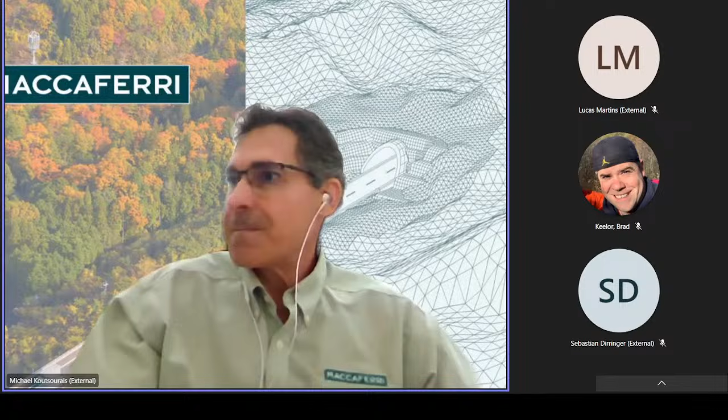Okay, good afternoon, everyone. Let me go ahead and share. Okay, hopefully everybody is now seeing the screen. Good afternoon again. My name is Mike Koutsourais. I'm the Geohazard Mitigations Business Unit Manager of North America for Maccaferri. For those of you unfamiliar with Maccaferri, the company was established 144 years ago. Currently has over 3,000 employees worldwide and services over 130 countries. In addition to having invented the Gabion basket, Maccaferri has been manufacturing and supplying geohazard mitigation systems throughout the world for over 60 years and is recognized as a leading innovator and manufacturer of these solutions.

I want to welcome you to our first geohazard mitigation webinar on simple drapery systems for rockfall mitigation. This webinar is the first of 3 geohazard mitigation webinars in which we will discuss the design, specification, and installation of simple drapery systems used for rockfall protection. Please look out for future ads on webinar number 2, where we will discuss how steel wire mesh is used as a flexible facing for pin drapery and soil nailing systems, and webinar 3, where we will discuss rockfall barriers and attenuators.

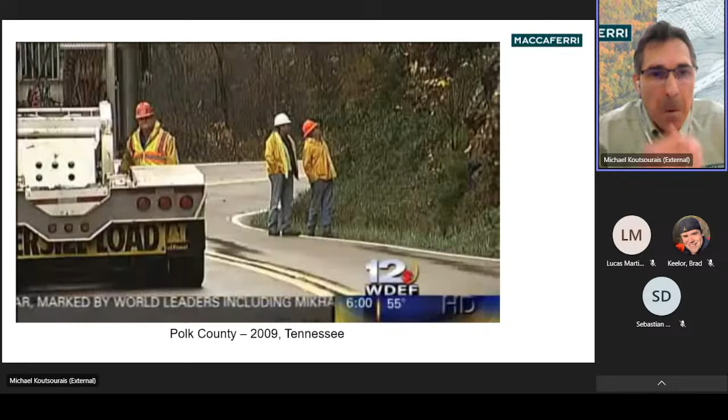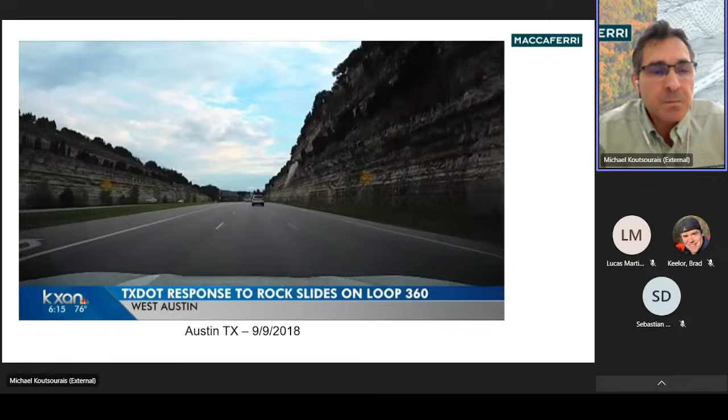Of the cliff, to see if there's anything that needs to be cleaned up. Then in about a week is when they plan to bring in equipment and really pick up all of the debris from the rock slides sitting on the side of 360 like you see now.

Now, if we're talking about the top of the cliffs, that is a different story we want to show you right now, and that is to remove rocks that may fall. Think larger rocks that could pose a bigger problem, things that look like they may shake loose. Now, that would require TxDOT to coordinate with private property owners.

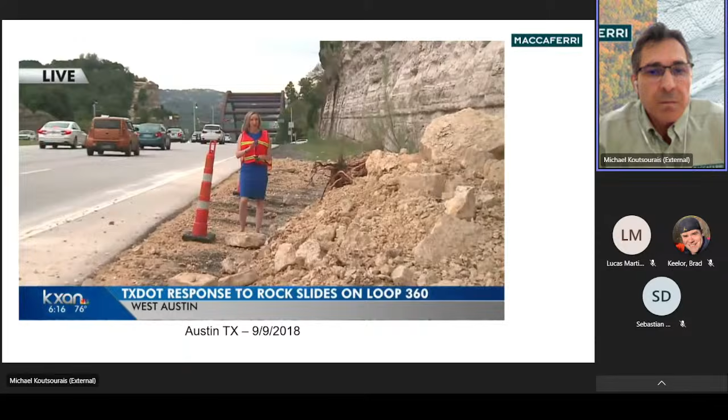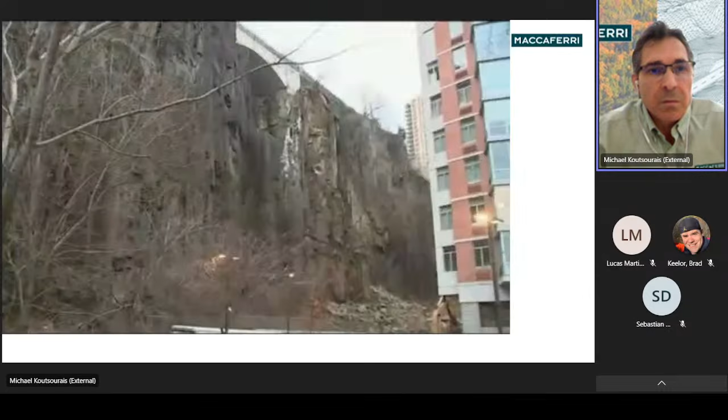Here's another one, just last month, occurring in northern New Jersey. More concerns tonight about the stability of the rocks on the spectacular Palisades in New Jersey overlooking the Hudson River.

A rock slide after Sunday night's rain damaged several cars at a luxury apartment complex. Tonight residents are worried about more rock slides and what can be done to protect them. Here's New Jersey reporter Anthony Johnson.

The rock slide was caused by the heavy rain we had Sunday into Monday. That's the conclusion reached by engineers. But residents living above the site believe increasing traffic is playing a part in causing the ground to shift.

There's been a large amount of heavy truck traffic in the area, cutting through these streets to avoid traffic in other areas, and there is an increased amount of vibrations, which is easy enough to feel. Antonio points to cracks in his retaining wall, which he recently repaired, to show the ground is shaking. These cracks were not here last year.

A photo taken inside the Dutchess apartment complex on River Road, just below the cliff, showed just how dangerous this could have been, with rocks landing in the building. Mud and rocks also covered vehicles parked in the back of the building.

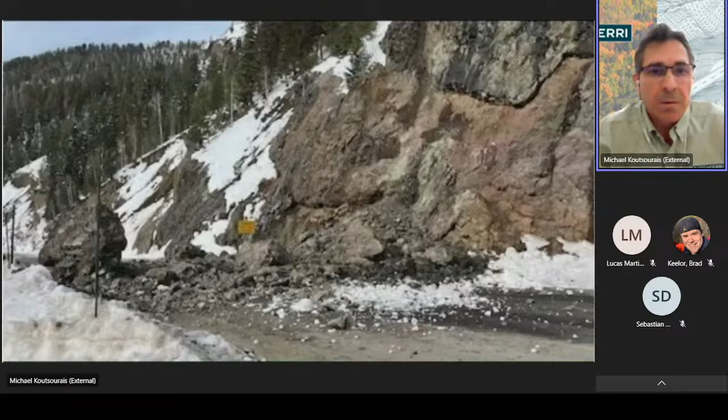John F. Kennedy Boulevard. And this one also just last month in Colorado. Images tonight of a rock slide on Wolf Creek Pass. Look at this, CDOT sharing this photo of the damage. It's off Highway 160 between Pagosa Springs and South Fork today.

You can see the road really was completely covered in rock right there. Officials say the highway was closed for a while, but they were able to open a single lane. They want anyone heading that direction to know there will be delays and one lane alternating traffic.

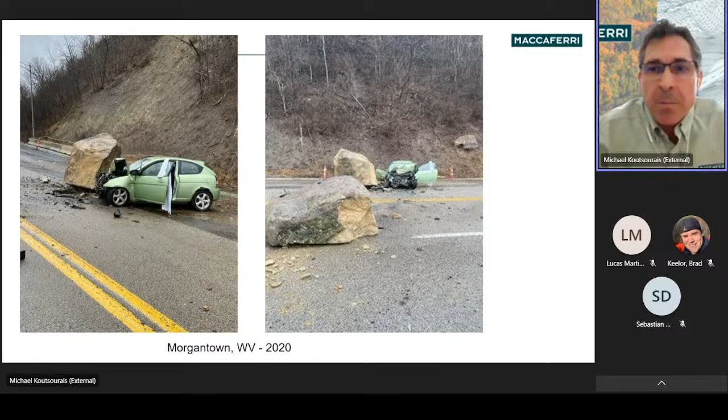All right, images tonight of a rock slide. This occurred back in February of 2020. This rockfall event sent three people to the hospital after a boulder struck a car on Monongahela Boulevard in Morgantown, West Virginia.

Possible rockfall solutions can be categorized into one of two methods. The first is to control or contain the event at its origin, and the second is to protect or intercept the event after its detachment.

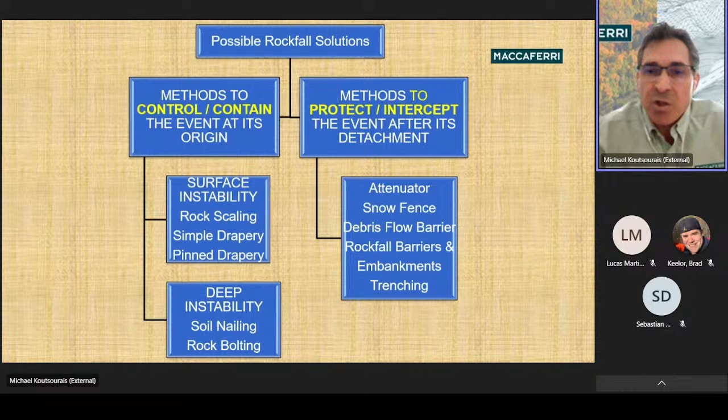Conventional methods to contain or control a surface instability at its origin include rock scaling, and simple and pin drapery systems. Soil nailing and rock bolting are used to control deeper instabilities. Methods to protect or intercept the geohazard include rockfall barriers, embankments and attenuators, and debris flow or shallow landslide barriers.

Methods to control and contain the rockfall event vary depending upon the nature of the instability. For example, to mitigate against superficial instabilities, as shown on the left side of the slide, a simple drapery may be considered to control superficial instability of smaller sized rockfall, whereas a pin drapery system may be considered to contain superficial instability of larger sized rockfall. The key word to consider for a mitigation approach that might include a simple or pin drapery system is superficial instability.

In choosing the right system for your project, it is also common to combine a simple drapery system with other mitigation systems, such as a pin drapery and/or a rockfall barrier, within the same scope of work to optimize costs and effectiveness.

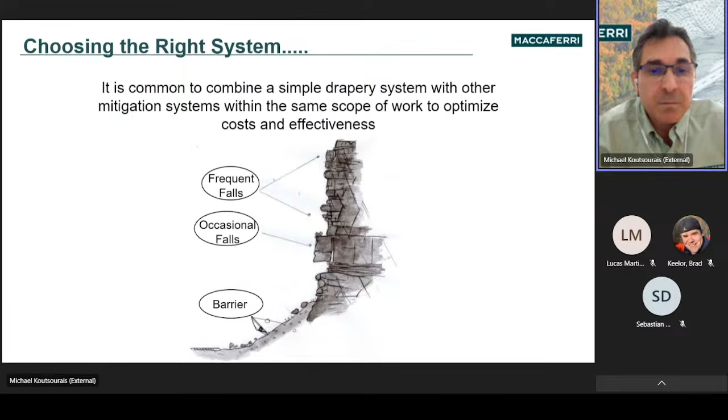Choosing the right mitigation system requires the designer to consider its placement proximity to the detachment area of the hazard and its most effective placement location. Systems that are placed close to the detachment area are typically simple or pin draperies. However, hybrid barriers and attenuators might also be a solution to consider.

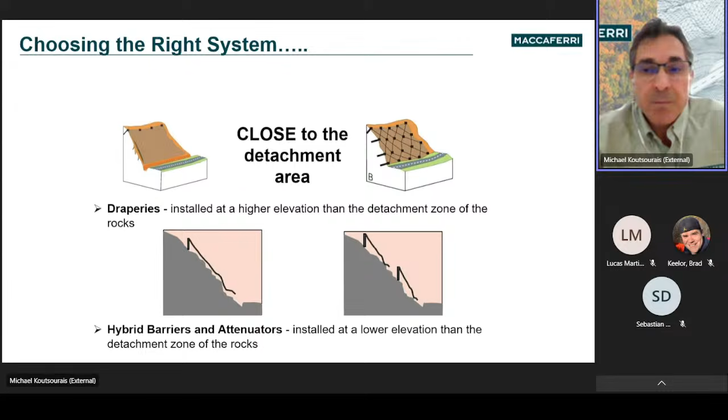Note that draperies are installed at a higher elevation than the detachment zone of the hazard, whereas hybrid barriers and attenuators are installed at a lower elevation than the detachment zone of the hazard.

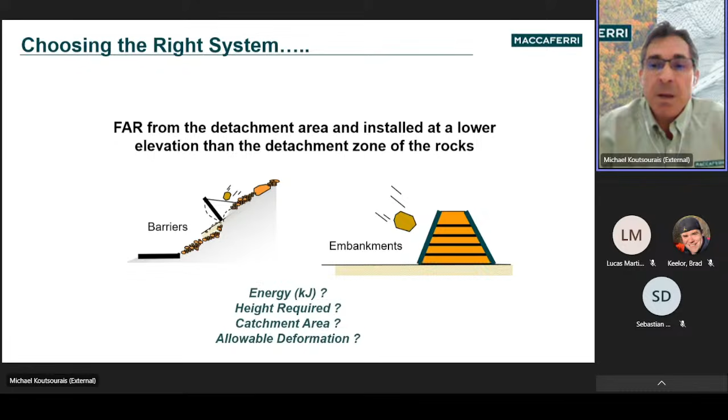Rockfall barriers and embankments are systems that are installed far away from the detachment area and at a lower elevation than the detachment zone, and are designed to intercept the hazard. For these systems, it's necessary to determine the energy that the protection system must resist, as well as the required height and allowable deformation to keep the hazard from impacting adjacent people and infrastructure.

Today we will focus our attention on the simple drapery system. We will present the application, design method, system components, and properties that a designer should specify, and finish up with some practical installation considerations and case histories.

A simple drapery consists of a high-strength steel wire mesh system that provides passive containment of the rock, meaning it allows for the movement of the rock. It's the movement of the rock that mobilizes the strength properties of the netting.

The goal is to control or contain the rock trajectory, reduce its energy and velocity, and force a sliding action down the slope, rather than allowing an uncontrolled free fall resulting in an impact and rebound.

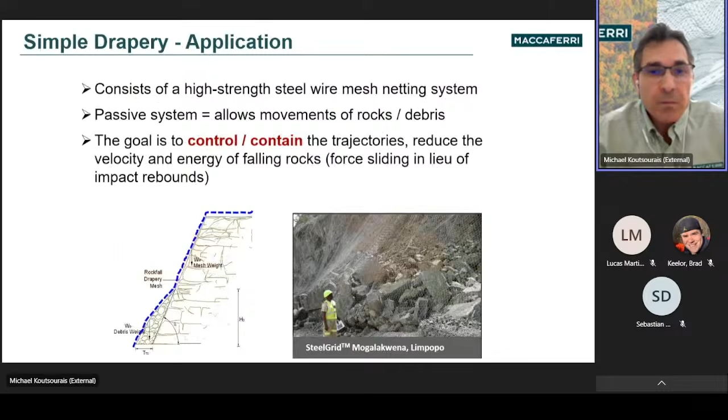A simple drapery will always be anchored at the top of the slope, but may or may not be anchored at the bottom. An open toe will require a catchment area at the bottom of the slope that would need to be designed to accommodate the debris, whereas if no catchment area is available, then the drape will need to be sealed at the bottom.

The anchors provide no stabilization effect. They are merely there to hold the drapery system on the slope and contain any debris from encroaching on the adjacent structure at the toe. The function of the simple drapery is to let debris collect at the bottom of the slope.

Looking specifically at the pros and cons of an open toe simple drapery: it's cost effective, very easy to construct and maintain. There's no excessive stress on the mesh and anchors since the toe is left open, and it can be designed for various size rocks with good control of the rockfall.

There is maintenance that's going to be required, and you do need ample space at the bottom of the slope for catchment.

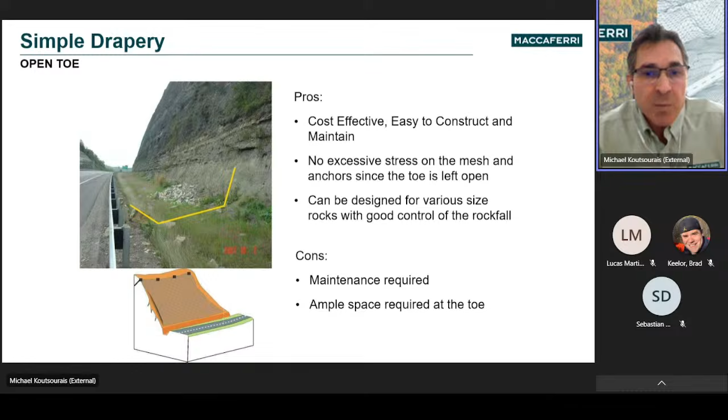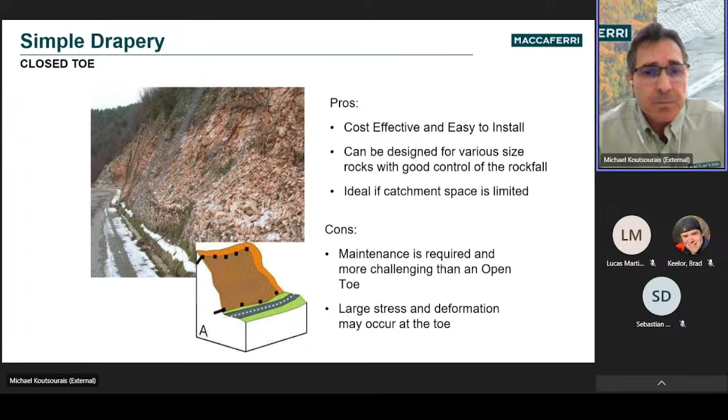As with any civil structure, it's always better to engineer the system, taking into consideration the slope characteristics, size of rock, expected debris accumulation, geological considerations, and potential failure modes. Of course, failures can be costly and embarrassing.

From a general design perspective, keeping things simple, we'll look at designing three main components: the steel wire mesh, the anchors required to hold up the mesh, and the cable required to hold the anchors. The goal, once again, is to control the trajectories, reduce the velocity and energy of the falling rock, and allow for controlled accumulation of debris at the bottom of the slope.

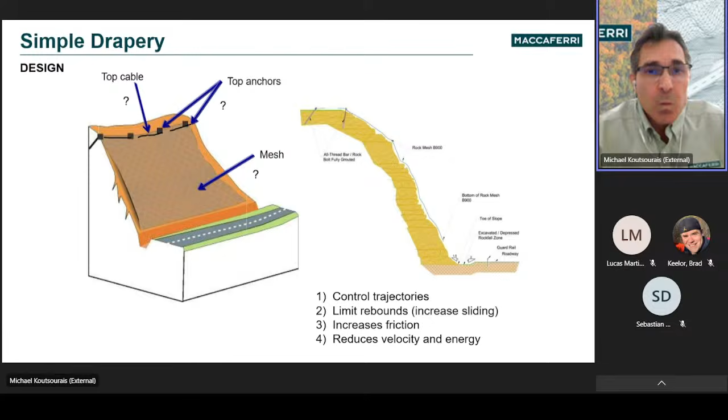The design will verify first the mesh resistance required, second, the top cable resistance required, and third and fourth, the intermediate and lateral anchor resistance required.

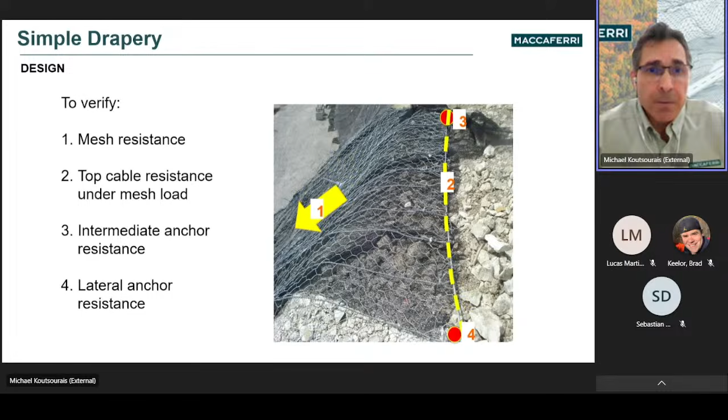To perform a realistic design, we must first have some basic understanding of the site conditions and usually make some reasonable assumptions. Here are some basic input considerations: slope height and steepness, density and strength of the debris, volume of debris accumulation and/or size of individual unstable rocks, and if snow or ice conditions may exist. We may need to make some reasonable assumptions to consider this additional load to the system as well.

The design of a simple drapery system must consider both the weight of the mesh and the weight of the rock debris that loads the mesh at the bottom of the slope, creating a tensile force on the mesh. As the debris accumulates at the bottom of the slope, the mesh strength must be designed to contain the debris accumulation.

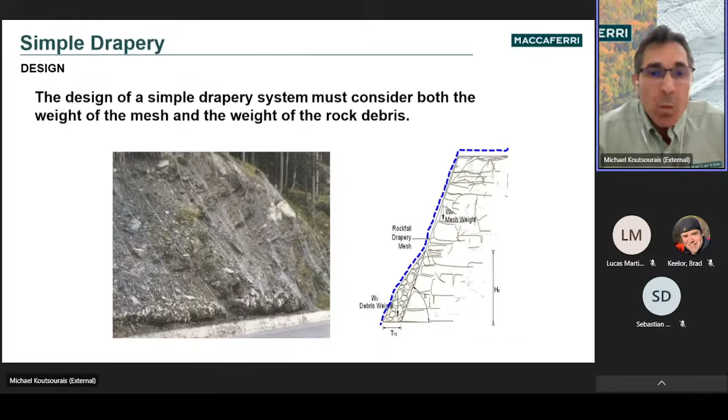The stress acting on the steel wire mesh is a function of the slope inclination, the debris accumulation, and the friction between the debris and the slope. As you see in this chart, the force acting on the mesh is on the y-axis, and the height of debris accumulation is on the x-axis. The force acting on the mesh increases as the debris accumulation increases, and the load also increases as the slope angle increases.

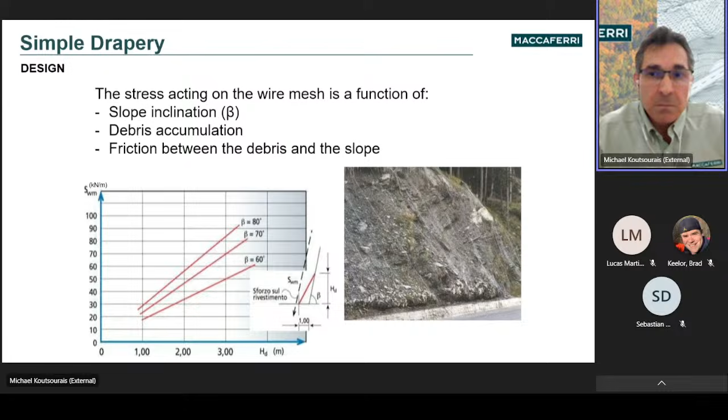The design method used is a limit equilibrium analysis, where we're determining the sum of the resisting and driving forces and determining a factor of safety. The resisting force includes the tensile strength of the mesh, which is transferred to the top cable and anchors. The driving forces include the weight of the mesh and the debris and snow loads.

Looking closely at the free body diagram to the right, you may notice while the mesh weight is a driving force that must be resisted, it is also a stabilizing force critical to containing the unstable rock or debris and dampening the rockfall energy.

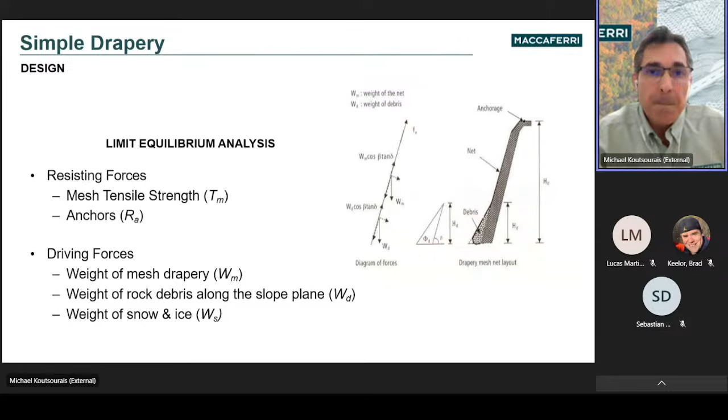The tensile strength of the mesh and the strength capacity of the top anchors must resist the load from the debris and snow and the weight of the mesh. The state of limit equilibrium is achieved when the sum of the resisting forces equals the sum of the driving forces.

The effect of snow and ice is very real and can have a large impact on the tensile strength requirement of the mesh and pull-out capacity required for the anchors.

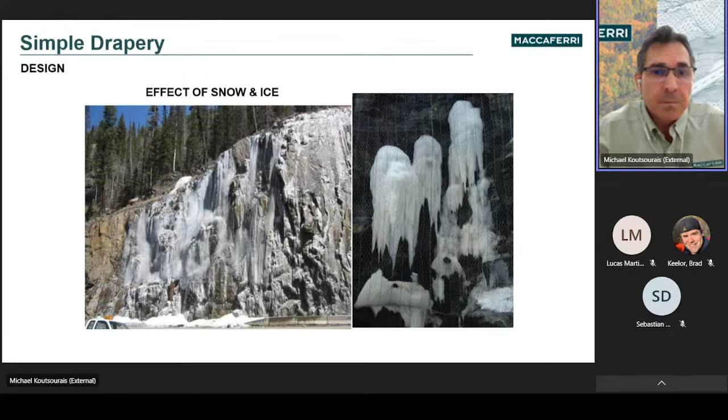The design of a simple drapery system must consider a realistic amount of debris that can be contained and consequently the stress in the mesh. The width of the debris accumulation, the mobilized deformation of the mesh, and the allowable distance to any adjacent pavement or structure, and the space needed for periodic maintenance must all be compatible.

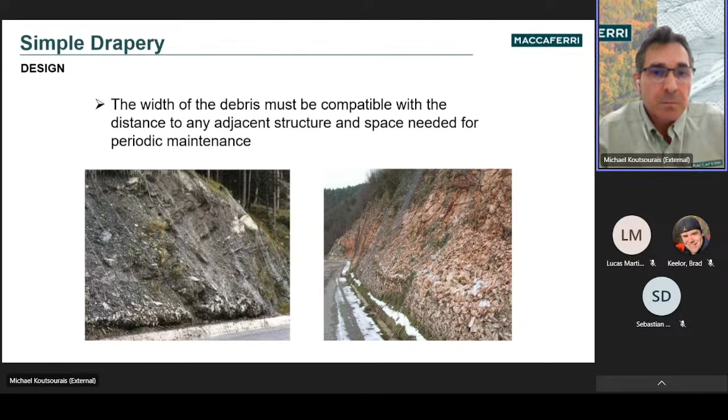The ability of a mesh to provide stabilization is determined by the mesh's ability to mobilize its strength under load. It's important that the strength of the mesh be mobilized within an acceptable design deformation.

This would be a concern for a closed-toe simple drape. The greater the deformation of the mesh under load, the more debris that can accumulate at the toe of the slope. As more and more debris accumulates, the required tensile strength of the mesh would need to be increased.

To control deformation under load and mobilize the full tensile strength capacity of the mesh, vertical high-strength steel cables may be woven into the mesh during the manufacturing process.

The Federal Highway Administration has acknowledged that the inclusion of vertical ropes in addition to a top horizontal rope reduces the stress concentration on the mesh as well as along the top horizontal rope.

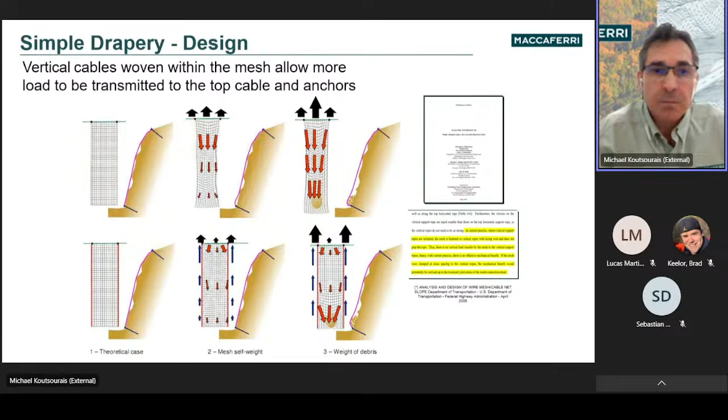With increasing the frequency of the longitudinal cables, higher tensile strengths are achieved at low deformations, and the reduction in stress concentration to the mesh and top cable is further improved.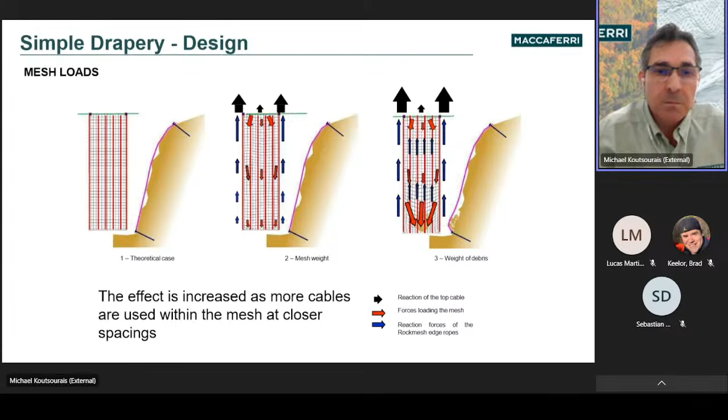Maccaferri manufactures a composite cabled mesh, which consists of a double-twisted steel wire mesh and high tensile strength steel cables, which are woven under tension into the mesh during the manufacturing process. The pre-tensioned high-strength steel cables result in ultimate strengths that are mobilized at only 6% strain.

The lower elongation under load results in less loading on the drapery system.

The Maccaferri SteelGrid HR is manufactured with high-strength steel cables woven longitudinally into the simple double-twist wire mesh. These longitudinal cables can be spaced anywhere from 20 centimeters apart, which is our SteelGrid HR20, to 400 centimeters apart, which is the SteelGrid HR400. Our most common product used is the SteelGrid HR30, where the cables are spaced 1 foot apart longitudinally.

These high-strength steel cables can also be inserted laterally as well as longitudinally. This is our RockMesh series of products. Our most common RockMesh products would have the longitudinal and lateral cables spaced 30 to 100 centimeters apart. RockMesh 3030, for example, which is shown in the photo, has the cables spaced 30 centimeters apart in both directions.

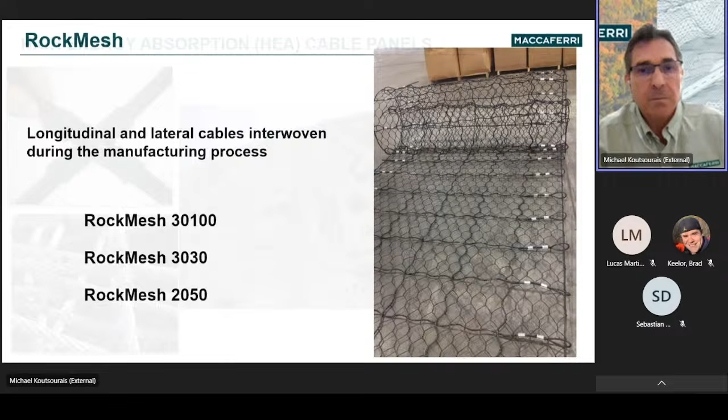The Maccaferri High Energy Absorption HEA cable panel offers the highest tensile and punch resistance of any product on the market and is commonly used in the most extreme conditions. It is manufactured with a single continuous length of high-strength cable wound to create a square grid net or panel connected at each junction with a Maccaferri patented double wire knot. The cable diameters range from 5/16 inch to a 1/2 inch, and the panel openings can be anywhere between 8 and 16 inches.

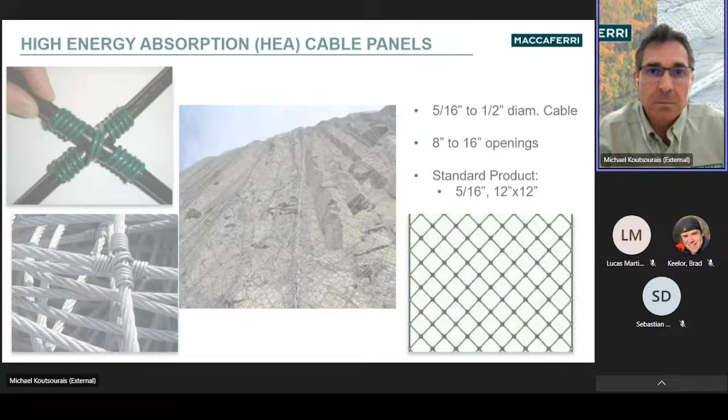In the design of a simple drape, there is no one size fits all. Maccaferri's approach is to design the system based on the project conditions and provide the appropriate mesh to meet the design requirements. Maccaferri provides a range of SteelGrid, RockMesh, and HEA panels with tensile strengths ranging from 3,500 pounds per foot to well over 12,000 pounds per foot.

Note that as the mesh tensile strength increases, so does its mass per unit area. The mesh tensile strength and mass per unit area are important characteristics that provide resistance to rockfall.

As a preliminary design guide, we can match a specific Maccaferri product to the rock size that would be contained. This, of course, would be a starting point, assuming no snow loads or otherwise unusual conditions. So SteelGrid HR400, where the cables are spaced 400 centimeters apart, that product can typically be used for rock diameters up to about 2 feet. As the rock size increases, we manufacture the product with a greater frequency of cables.

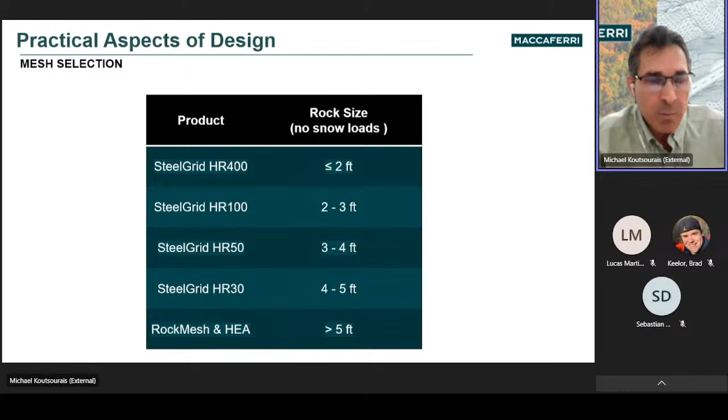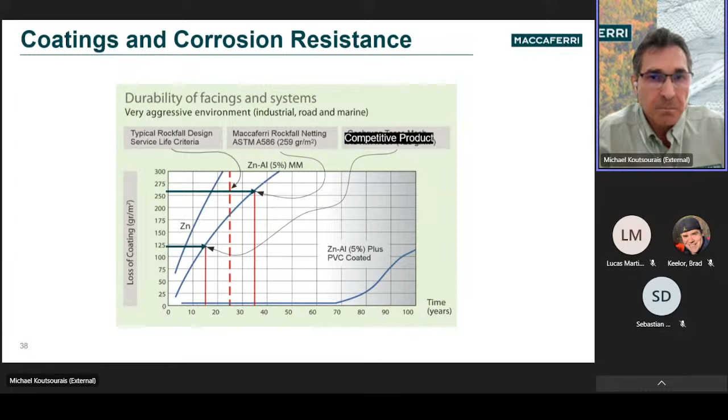Now that we know the loads acting on the mesh and the required strength of mesh that must be mobilized, we can look at designing the top support cable and anchor capacity at the top of the slope to support the mesh. Specifically, we need to determine the anchor strength to resist shear and tensile loads, the anchor pullout capacity, and the anchor spacing along the crest of the slope. Theoretically, larger diameter and/or longer anchors can be spaced further apart, so all components and connections of the system must be weighed against practical and installation cost considerations.

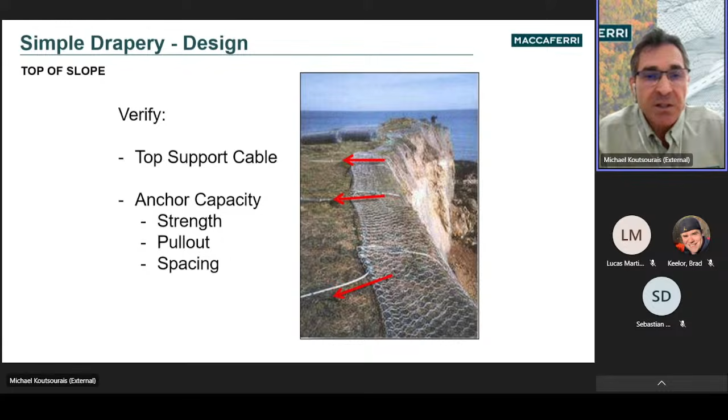In designing the top cable, we determine a factor of safety based on the allowable design strength of the cable divided by the maximum tensile force acting on the cable. The allowable design strength is taken as the ultimate strength reduced by a factor of safety, and the maximum tensile force acting on the cable is calculated based on catenary theory, which takes into account the lateral spacing of the anchors.

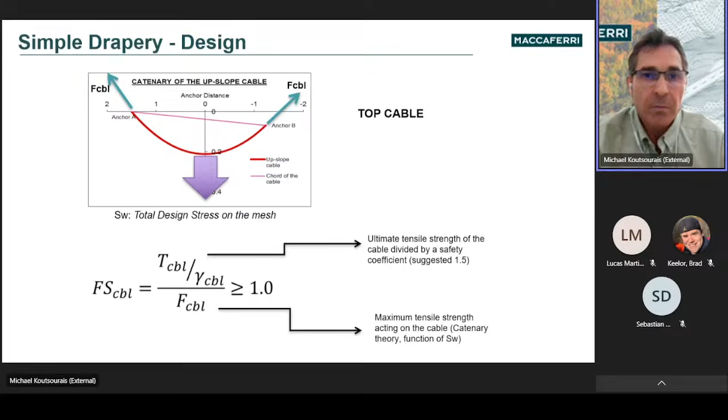In designing the anchor capacity, we need to look at the tensile and shear strength of the anchor element itself, the bond strength between the grout and the anchor, and the bond strength between the grout and the rock or soil. The contribution of each anchor depends on the capacity of the anchor and the lateral spacing between anchors.

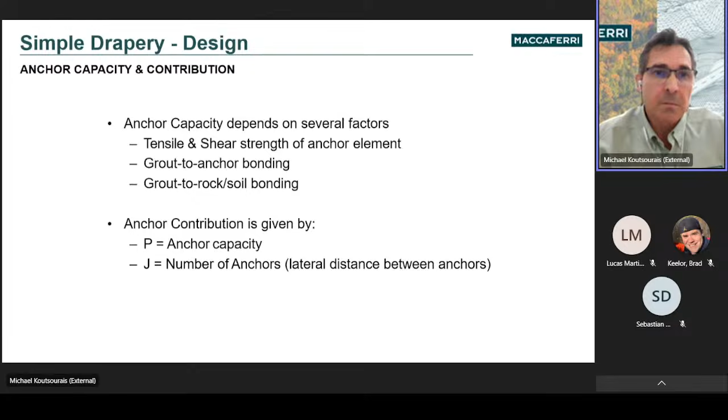The anchor size is then determined by considering the working shear or tensile strength of the anchor and the shear or tensile force acting on it. Dividing the working strength by the active force gives you the factor of safety.

The anchor plays an important role because it must support the whole system. Its length must be deep enough to reach the stable section. The minimum theoretical anchor length is described in the equation shown, where L sub S is the minimum foundation length and L sub P is the length of plasticization.

The minimum foundation length, L sub S, is a function of the diameter of the drill hole, the bond stress between the grout and the rock, and the maximum pullout force applied, calculated with catenary theory.

The length of plasticization, L sub P, is the portion of the stable rock mass that loses its strength due to bend deformation of the anchor bar stressed by a load. The values of L sub P depend on the type of rock, ranging from 6 inches for hard rock, about a foot for weak rock, and 1.5 to 2 feet for weak, very weak, or highly jointed rock.

It should be noted that the design anchor length should be field verified during the drilling operation to confirm the design calculations.

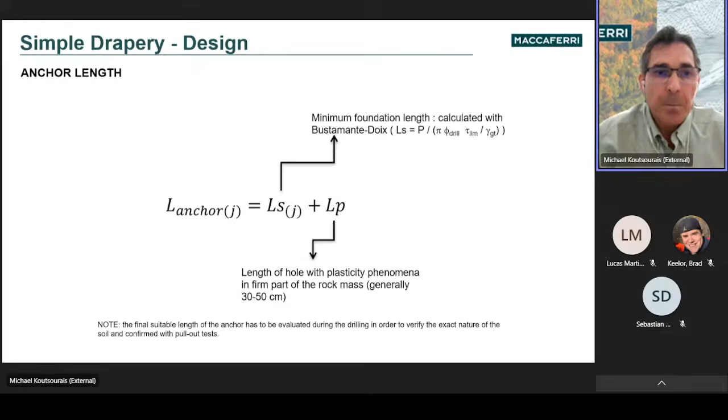In designing a simple drapery, Maccaferri offers several design tools, including the MacRO2 design software, a theoretical design manual if you wish to review and verify the computer analysis, product technical data sheets, product standard specifications, and typical drawings and details.

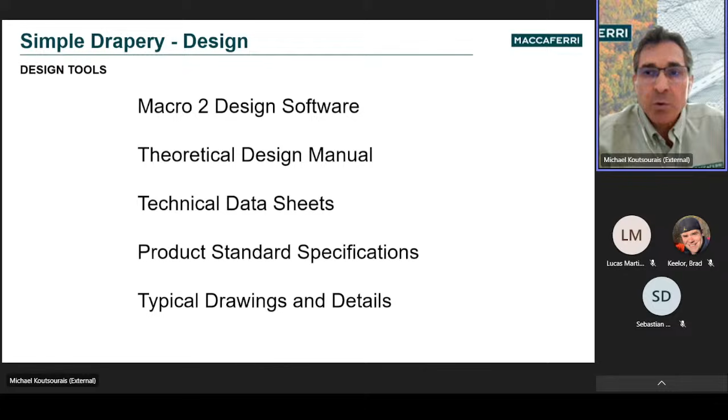Here's a quick look at the input screen of the MacRO2 design software. The user would input the rock slope characteristics, including the slope height and steepness, characteristics of the debris accumulation, and snow loading conditions. Then the user would choose the steel wire mesh to be analyzed, and for ease of use, the properties of the mesh are already hardwired into the program.

Then the user would input the anchor type and spacing and the crest rope diameter. The program has hardwired the properties of the anchor and crest rope and has recommended safety factors. However, the user may override these hardwired values as necessary.

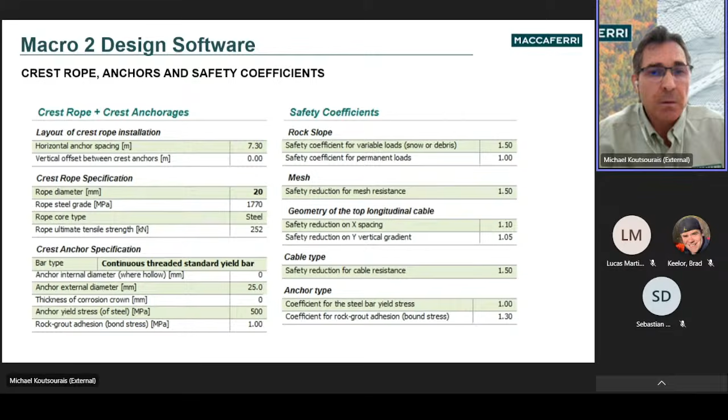Finally, the factors of safety for the design of the mesh, crest rope, and intermediate and lateral anchors are calculated and shown at the top, with the details of the calculations also presented down below, including the stress on the mesh, the maximum force on the anchors, and the minimum anchor diameter and length.

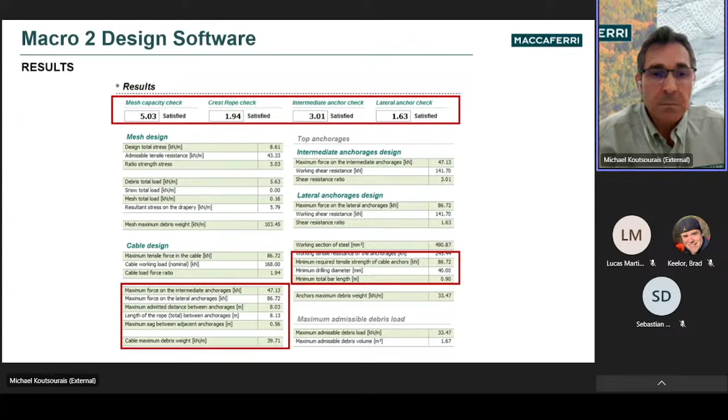Best results are achieved through analysis and experience combined. Even if the software allows a quick and simple calculation, on-site observations and experience are always useful to achieve a good design. So we would encourage you to give us a call and let us assist you.

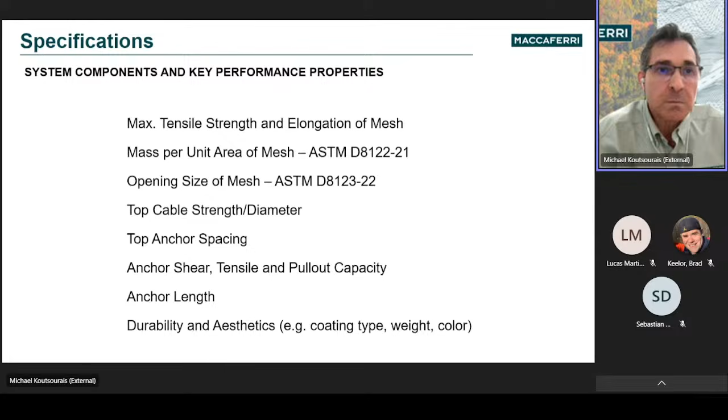Next, we'll look at some practical aspects of design and installation of the simple drapery.

The first practical aspect of design is to select the appropriate mesh. Rather obviously, the larger the rock or greater the mass of debris that needs to be contained, the heavier the load acting on the mesh. And the higher and steeper the slope, the heavier load due to the weight of the mesh. In either case, the required tensile resistance of the mesh would increase.

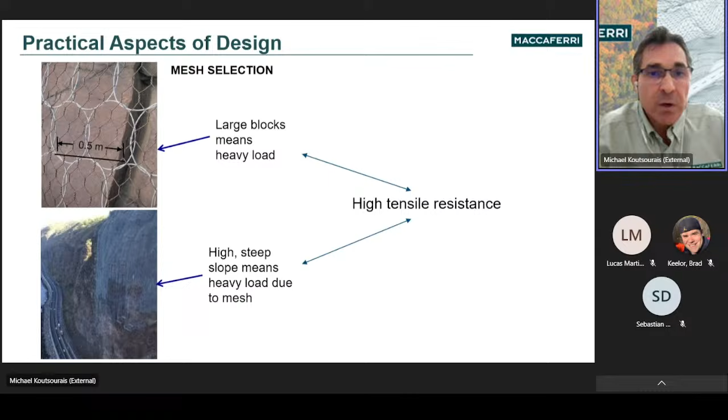Next, we need to size the diameter of the top cable and size and space the top anchors. If the anchor spacing is too large, you can expect greater stress and deformation of the top cable and a lower level of safety if an anchor were to fail. Therefore, typical top anchor spacing is between 12 to 25 feet.

For a closed-toe simple drapery, the bottom anchors are typically spaced 25 to 50 feet apart. The diameter of the top cable is usually between 1/2 and 7/8 inch, and more commonly 5/8 to 3/4 inch diameter.

At the top of the slope, it's important to make sure the mesh extends to a higher elevation than the detachment zone, and that the anchors are founded in stable ground, with not less than 5 feet of free top area as a rule of thumb.

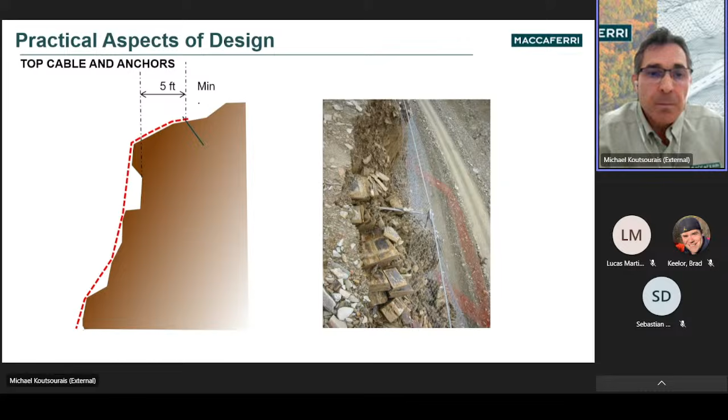So unless otherwise required, we'll always use the double leg cable anchor for the top anchors in our simple drapery kits.

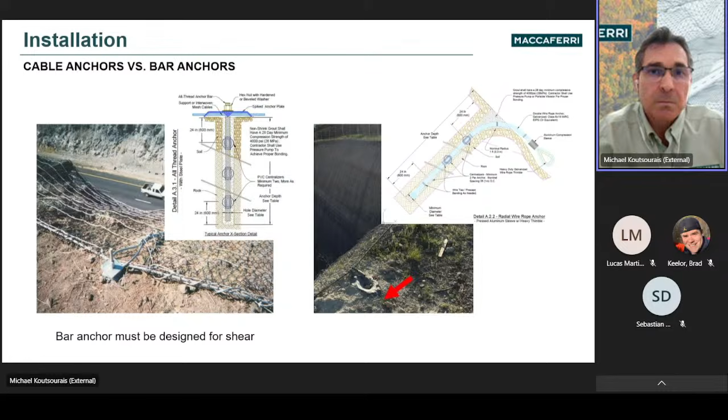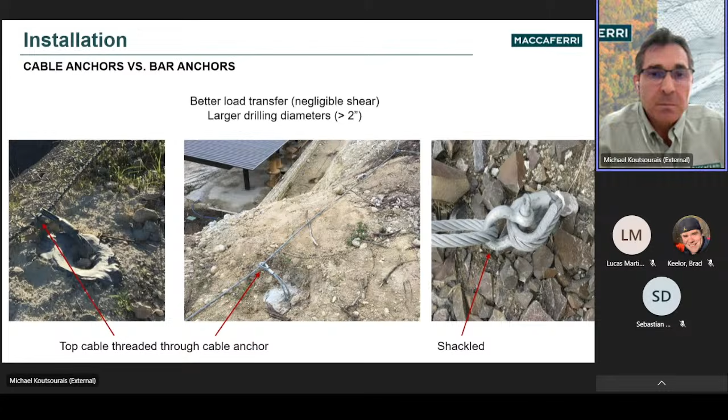As mentioned before, the simple drapery system needs to extend above the rock detachment zone, and the anchors need to be extended into firm, stable ground. So it's essential to consider the location of property lines and easement limitations and the effect they will have on the necessary coverage and anchorage of the system.

So there are alternative solutions for this case, such as a raised drape.

Here are some slides showing the installation of a simple drapery system using a man lift.

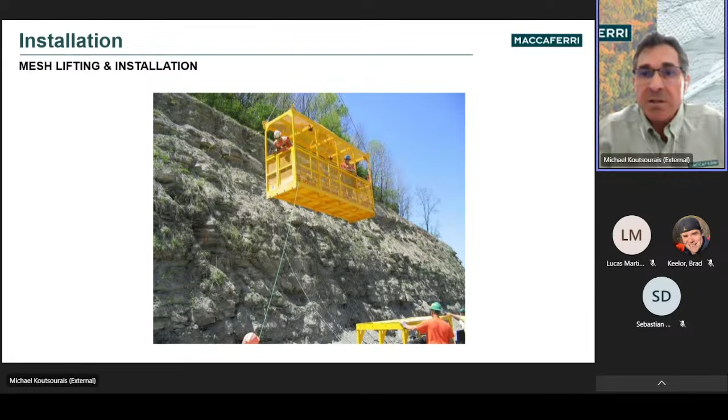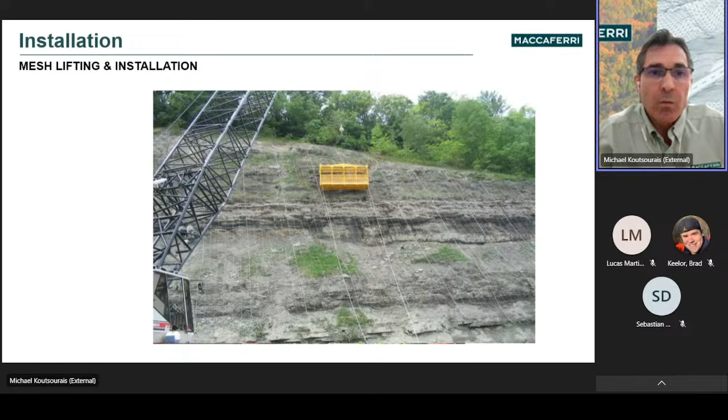And in remote and difficult access areas, the mesh rolls may be attached together on the ground, secured to a helicopter, and flown into place.

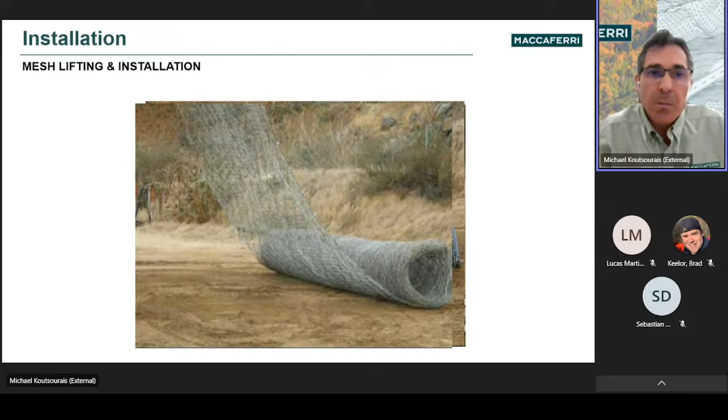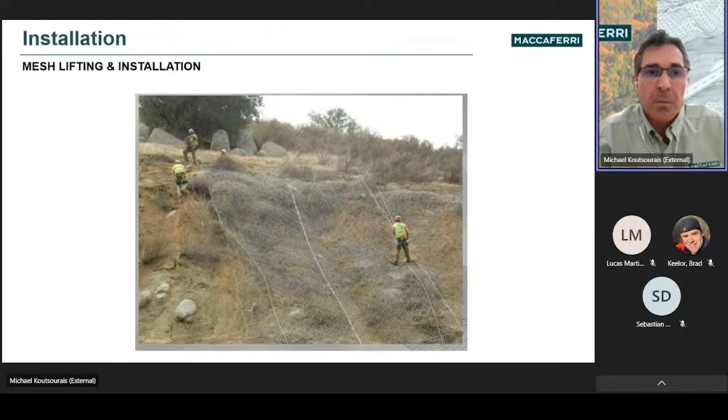Here you see guys on the slope making the necessary panel connections. Depending on the type of mesh and topography of the slope, the mesh may be joined together by hog rings, special steel links, or lacing cable.

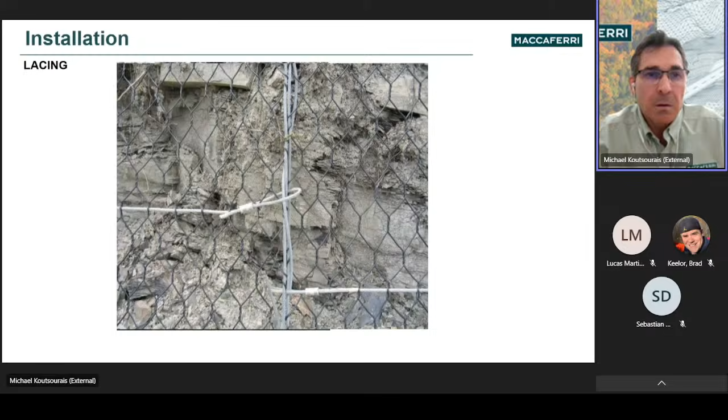Now we'll go through some case histories. In this particular project, Thompson Creek Mine, the slope ranged from 330 to 500 feet. The rock size was about 1 foot to 2.5 feet, and a free fall maximum energy of 500 to 800 kilojoules. The solution had to consider two main aspects: first, low maintenance, and second, making sure there was no surface reduction of the working area at the bottom of the mine.

A simple drapery solution was determined to be the best for this project for several reasons. First, the high uneven morphology of the slope was not suitable for a rockfall barrier. The rockfall trajectories were too high to be intercepted by a standard barrier, so several lines of barriers would have had to be installed. The slope gradient was too high for a rockfall embankment, and the space at the bottom of the slope could not be reduced—embankments generally require significant space at the bottom of the slope, so that solution was eliminated. The surface was also too big to install a cost-effective pin drapery system, which is expensive and requires a lot of drilling. So the most obvious solution was a simple drapery.

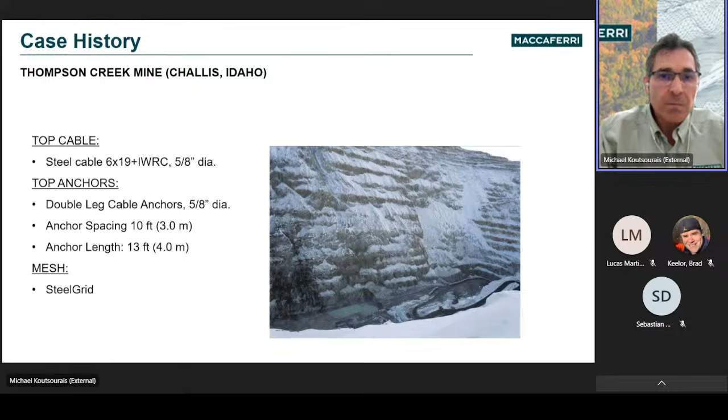The Maccaferri high-strength SteelGrid HR30 was the product chosen, with a 5/8 inch diameter top cable and 5/8 inch diameter double leg wire rope cable anchors, spaced 10 feet apart with a length of 13 feet. Those are the general conditions for the solution.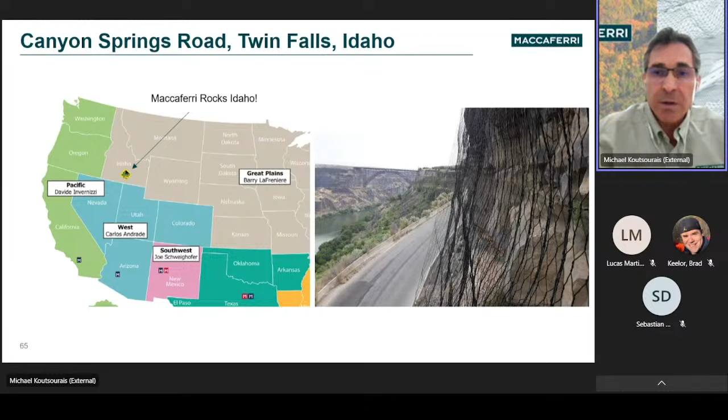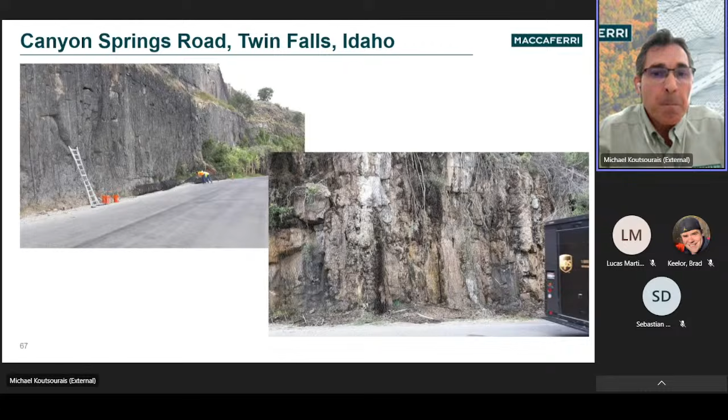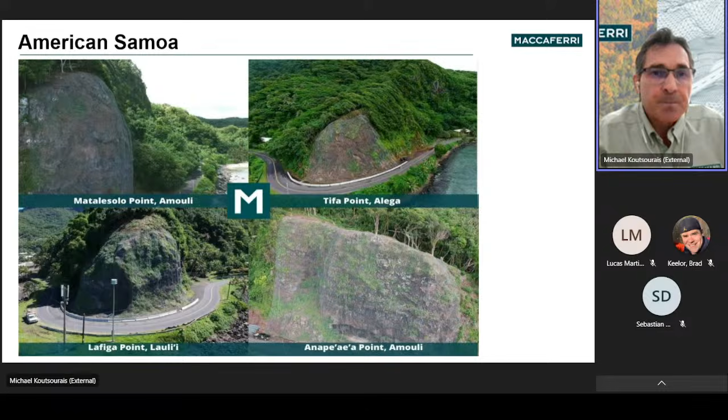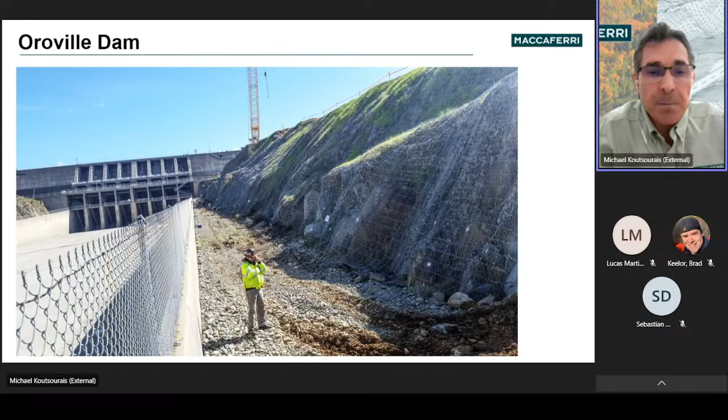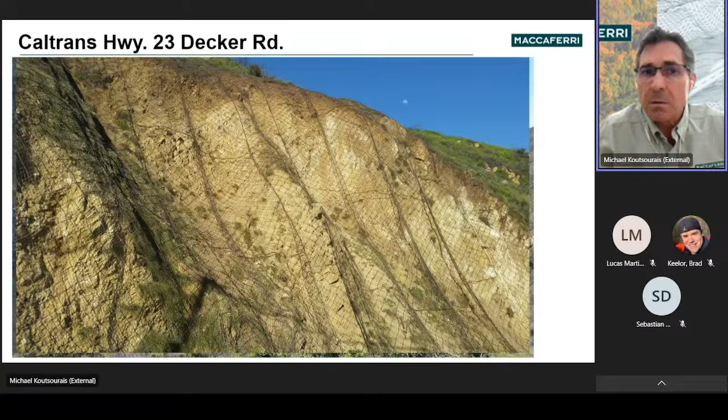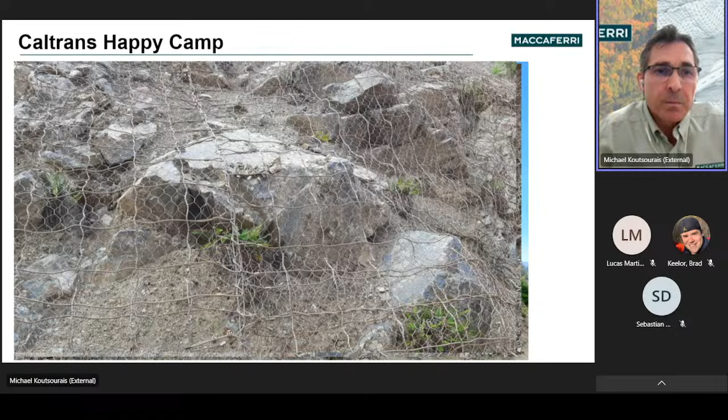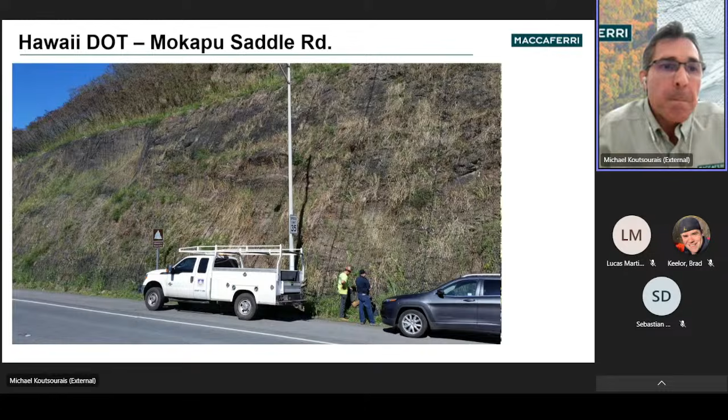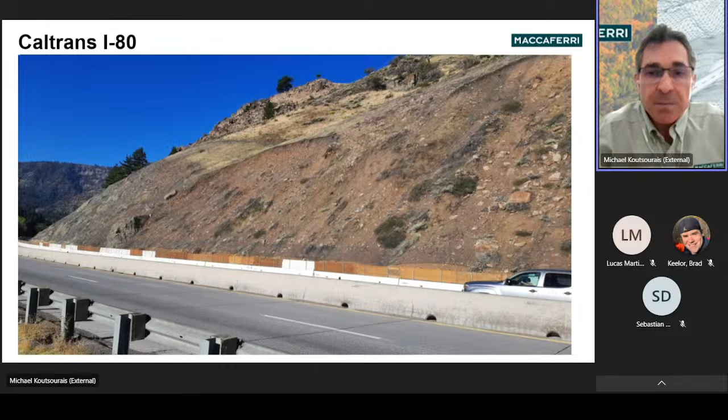This is another Caltrans project along a 2-mile stretch of I-80, just west of the California-Nevada state line, to prevent continued rockfall along the shoulder areas and roadway. Various sections included flattening existing slopes, installing a simple double twist wire mesh drapery, and installing 279,000 square feet of Maccaferri high energy absorption cable nets, pre-attached to a double twisted wire mesh raised drapery system. For aesthetic purposes, the HEA cable nets were powder-coated gray and attached to a polymer-coated gray double-twist wire mesh.

This is the same I-80 as that previous project, but on the eastern side of the country in New Jersey. Interstate 80 between New Jersey and Pennsylvania is a heavily trafficked area, carrying approximately 18.5 million vehicles per year. The existing rock cut areas result in safety hazards, as evidenced by steep rock face, loose boulders and rock blocks, and have resulted in rocks toppling down and landing on the shoulder and roadway lanes. This high rockfall risk combined with high traffic volume was an important concern for the traveling public and the New Jersey Department of Transportation. They implemented a simple drapery solution designed and specified by Haley and Aldrich, where 40,000 square feet of the Maccaferri SteelGrid HR30 simple drapery kit was used.

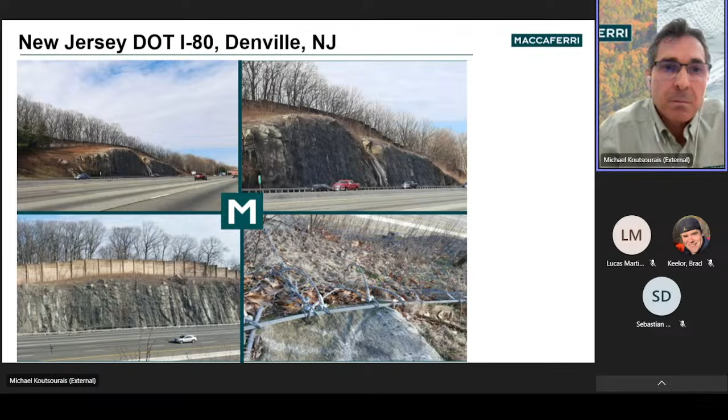Rock slides are also a common issue in parts of eastern and southern Ohio. The Ohio DOT identified nearly 40 locations in more than a dozen counties where slips and rockfalls are likely to occur in the near future. Among them was US Route 33, southeast of Athens, a section used by nearly 9,500 vehicles per day. At this site, a simple drapery system consisting of 135,000 square feet of Maccaferri RockMesh 2050 was installed.